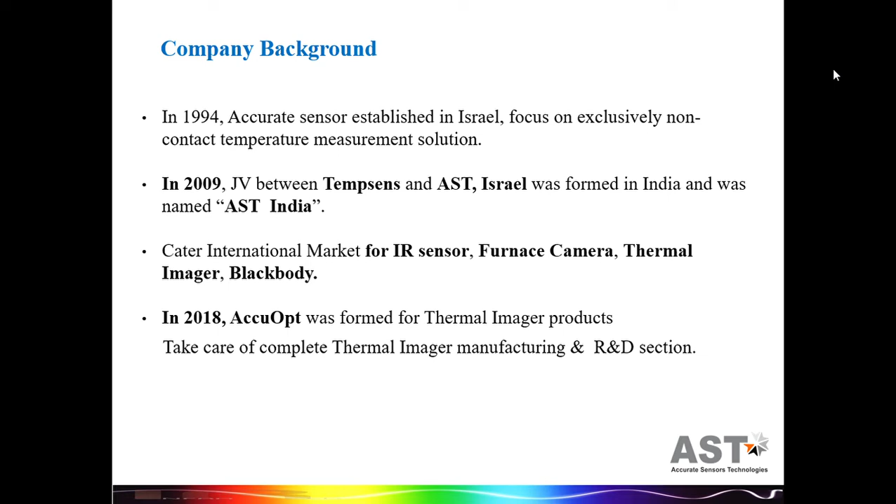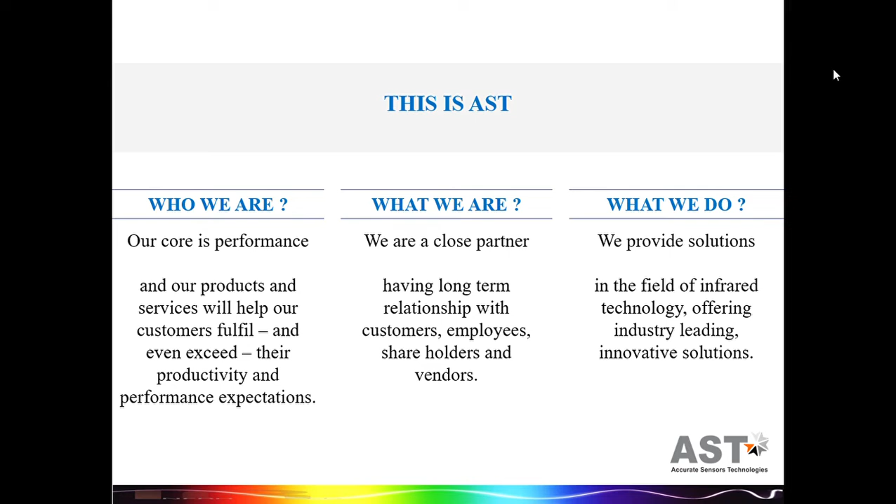If I am talking about AST, then our core is our performance, our products, and our services, which we provide to our customers to increase their productivity and fulfill their expectations. We believe in long-term relationships with our customers, our employees, our vendors, as well as our shareholders. We provide solutions in the field of infrared technology to industries and provide them innovative solutions.

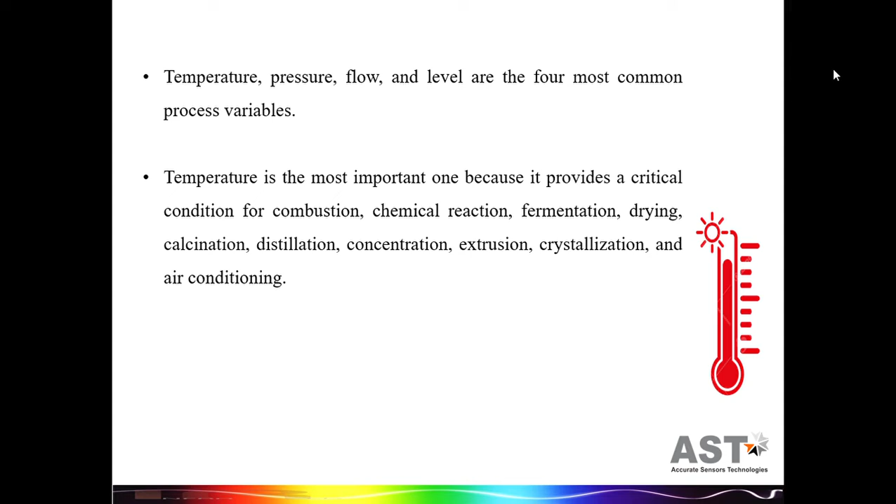Now I'm coming to my topic, infrared pyrometers for industrial applications. As we all know, there are four most common process variables: temperature, pressure, flow, and level. Here we discuss temperature, because each and every process temperature has its own significance.

We can say that if your temperature control is poor, it will become an adverse effect on the safety, on quality, and on your productivity. Although it is often difficult to measure the accurate temperature, here we are discussing the non-contact method of measuring temperature.

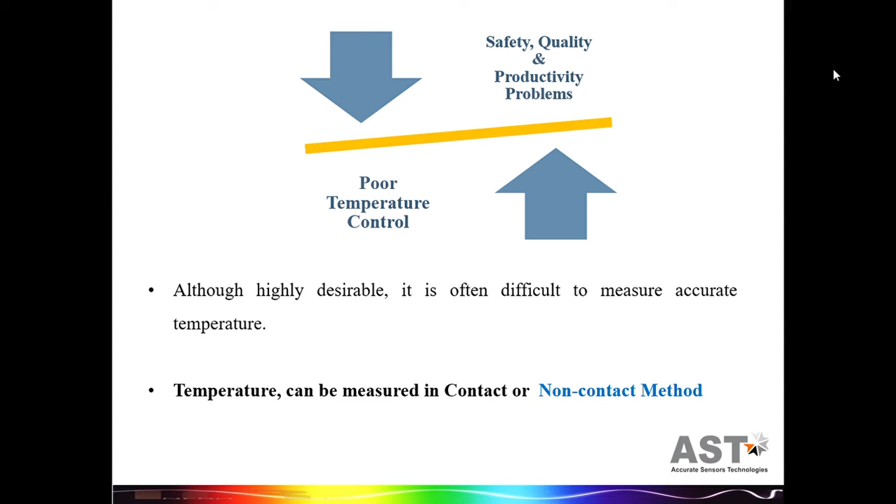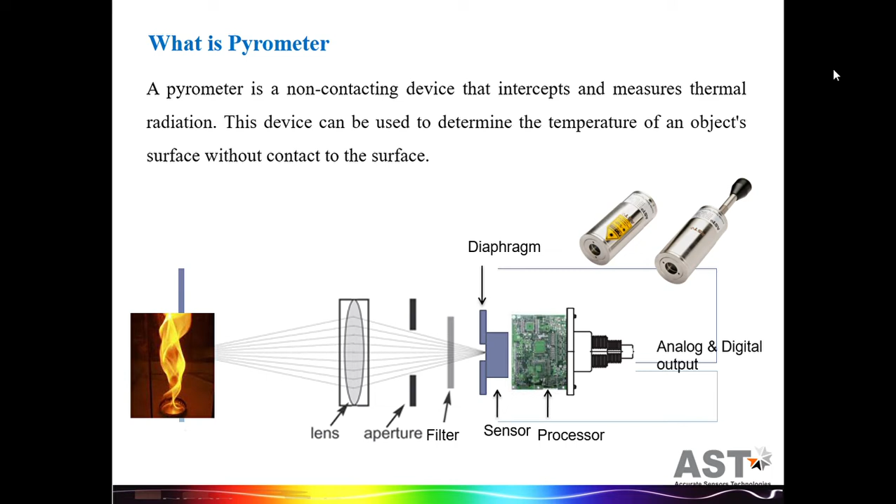To discuss the non-contact method, first we have to understand pyrometers. What are pyrometers? Pyrometers are basically equivalent to cameras. Like cameras, they also have lenses, apertures, filters, sensors, and processors. A pyrometer is a non-contacting device that measures thermal radiations, used to determine the temperature of an object's surface without contact to the surface.

Why do we prefer non-contact sensors? Because they are fast. If your target is moving, then you have to choose non-contact sensors. For hazardous applications, and if you can't access your object physically, then again you go to non-contact sensors. For high temperature measurement, or if your product will be contaminated by using contact methods, you again choose non-contact sensors.

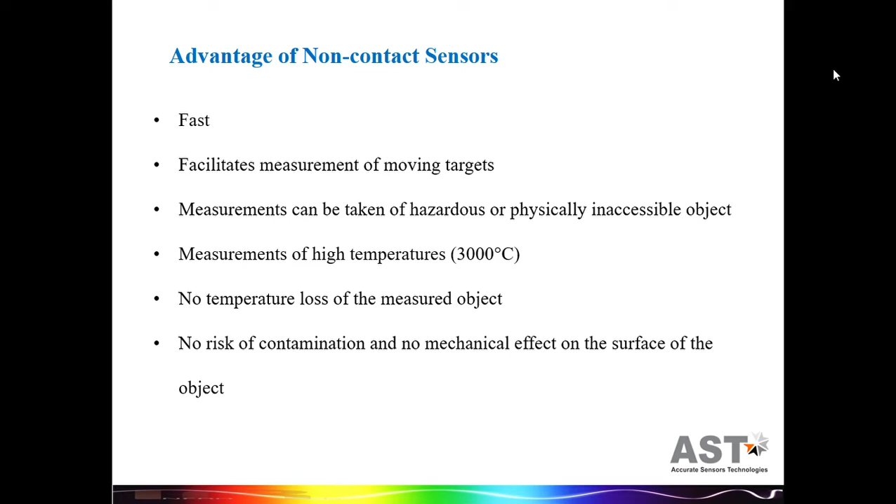AST has a vast range of products in which we are offering so many pyrometers for your applications. We have A plus series pyrometer, A series pyrometer, T series pyrometer, E series pyrometer, glass pyrometer, and portable pyrometer. We have some special pyrometers also, which are Swift, our PGM model, SRU, P390, and P450C.

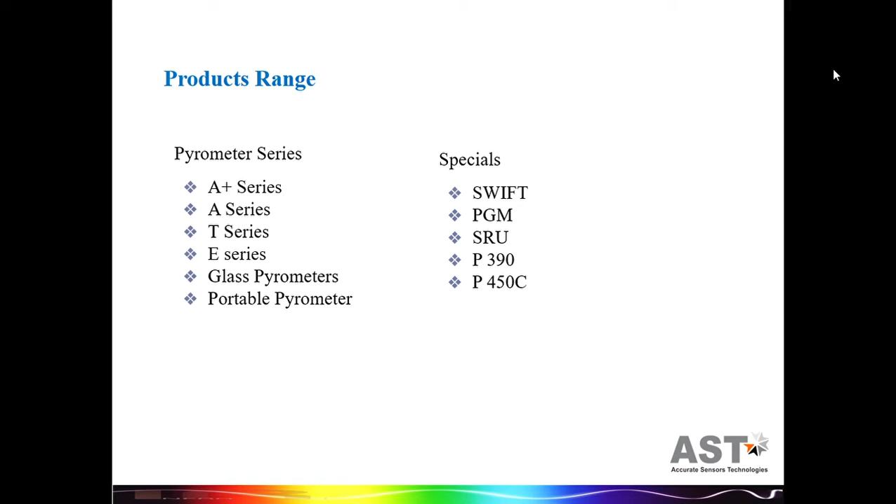It is always a main question: how to choose our pyrometer? There are so many factors on which we can decide which pyrometer is suitable for us. Here I am discussing some factors. First, the major important factor is application. If you know the application, then you can choose your pyrometer. Second is temperature range, working distance, type of surface, and your spot size.

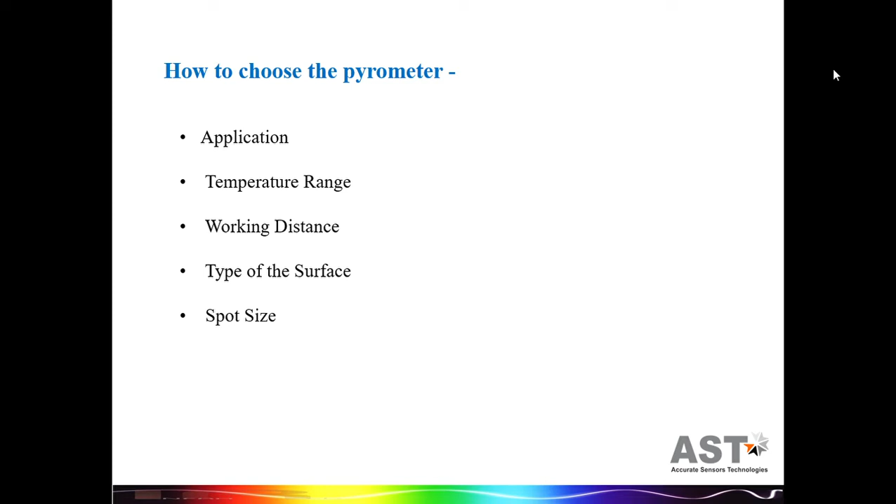Here we suggest some models according to the applications. If you are working on metallic applications, you can go with our A series model, A plus series model, E series model, portable 250 and 450C, T3 model, and FOPL.

If you are working on glass applications, you can choose our model AL 514, T3 514, TL 514, our portable pyrometer 450G2, and PGM plus.

For non-metallic application, we generally recommend AL30, EL50, T3 814, TL8, and TI 1500.

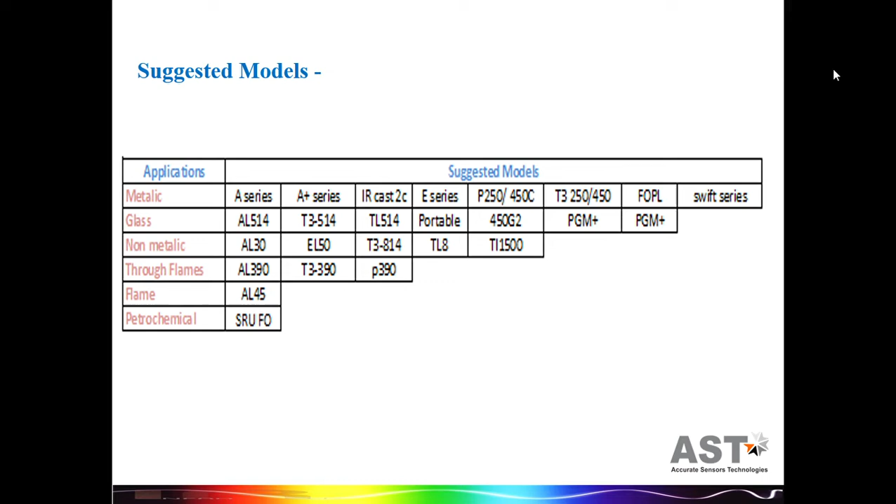If you want to measure the temperature through the flame, you can choose our model AL390, T3390, and P390. If you want to measure the temperature of flame itself, you can go with our model AL45. And for petrochemical industries, we recommend our SRU model.

Now we are talking about steel industry applications. As in the steel industry, there are so many applications where we can recommend our pyrometer. Our first application is annealing furnace.

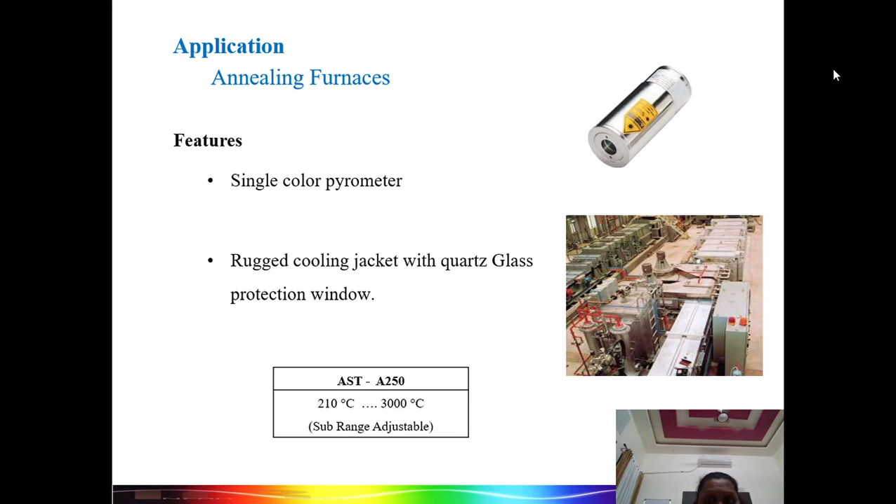In this application, metal is heated to a predefined temperature, held for a certain time and then cooled to room temperature to improve the ductility and reduce the brittleness. So in this application, we suggest our model A250 with temperature range 210 to 3000 degrees centigrade. It's our single color pyrometer, and it comes with accessories like a rugged cooling jacket with quartz glass protection window.

Oxygen furnace ladle temperature before hot metal pouring application. In this application, ladles are preheated before being used. So we recommend here our model A450 with the temperature range 600 to 2500 degrees centigrade. In the software of this model, we can provide you a peak picker facility. This facility enables us to record the temperature of each ladle.

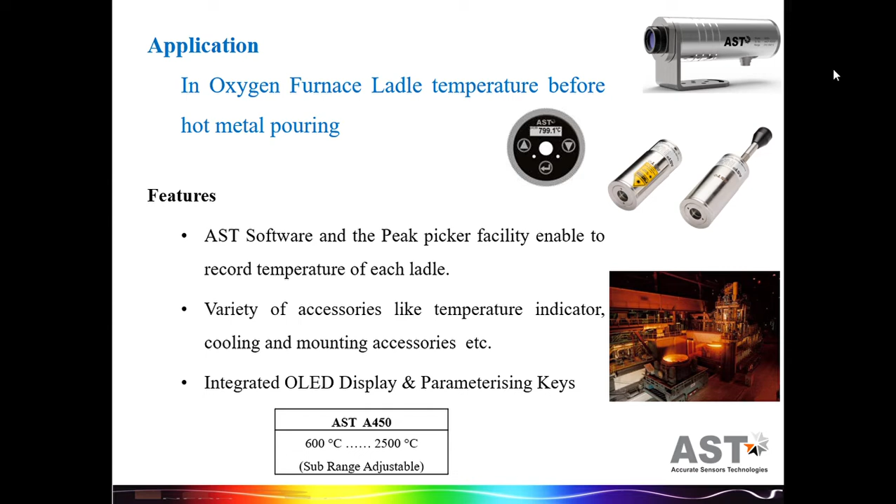In this model, we offer you many accessories like temperature indicator, cooling and mounting accessories, etc. As well as, we have OLED display and parameterizing keys with this model.

For hot rolling application, we recommend our model A450. It is a metalworking process that occurs above the recrystallization temperature of the material. In this pyrometer, again, you have the peak picker facility for continuous data storage, as well as its spot size is small, so you can find the hottest spot and measure the real hot surface temperature instead of oxidation scaling. This model again comes with OLED display and parameterizing keys.

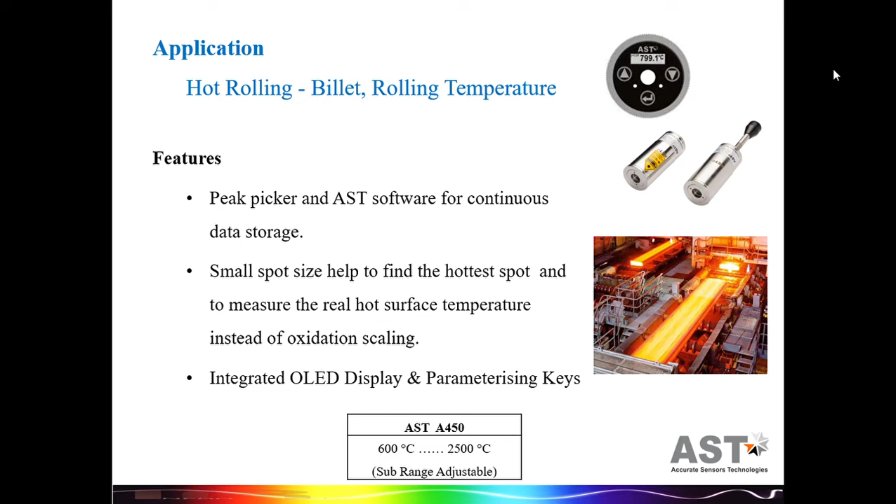For TMT application, we recommend our model A250, A450 with the temperature range 210 to 3000 degrees centigrade. TMT stands for thermomechanical treatment. In this application, many stages are involved like water quenching, heating, cooling. So we recommend this model.

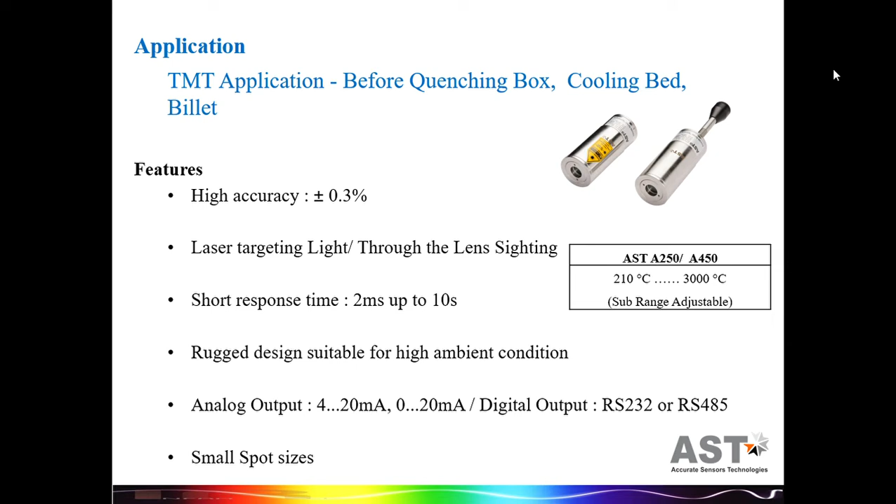It has high accuracy of plus minus 0.3%. It has laser target light as well as through the lens sighting. It has a short response time of 2 milliseconds up to 10 seconds. It has a rugged design which is suitable for high ambient conditions, and the spot size is small.

Molten metal in blast furnace application. In this application, we recommend our model A450C with temperature range 600 to 2500 degrees centigrade. In molten metal application, the end product is molten metal, slag plus waste gases. Due to waste gases and atmospheric disturbance, we recommend our two-color pyrometer. It is a ratio pyrometer which gives us more accurate readings than a single color pyrometer. It has through the lens sighting for precise target focusing, and it has a small spot size.

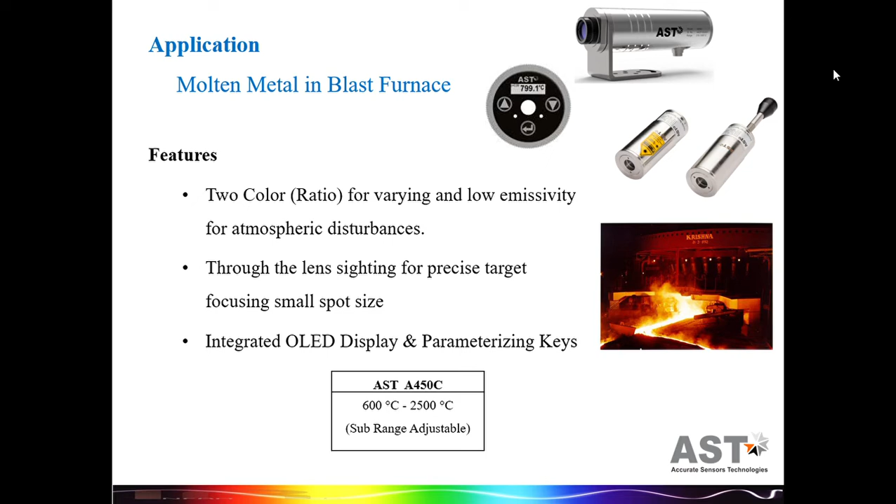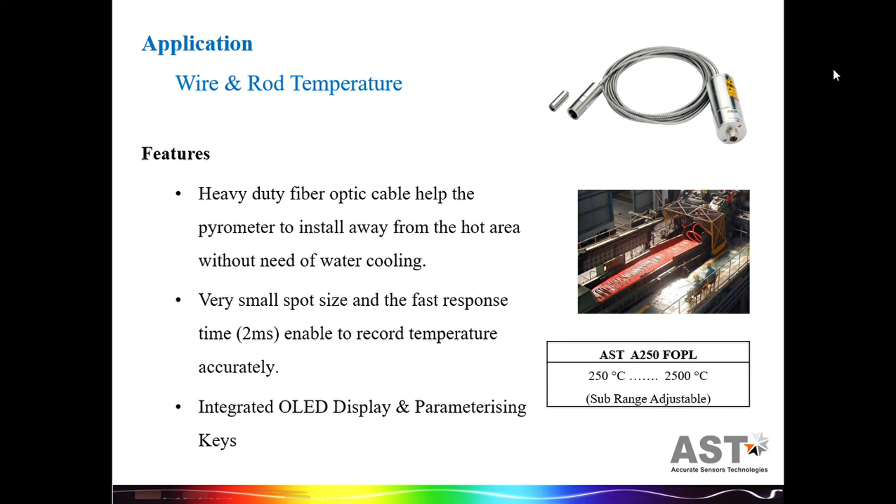In wire and rod temperature application, we recommend our model A250 FOPL with temperature range 250 degrees centigrade to 2500 degrees centigrade. This model comes with fiber optic cable which helps the pyrometer to be installed away from the hot area without need of water cooling. It has a very small spot size and a fast response of approximately 2 milliseconds, enabling it to record the temperature accurately. It comes with OLED display and parameterizing keys.

Stove dome application. In stove dome application, we recommend our model A250 CFOPL or A450 CFOPL with temperature range 350 degrees centigrade to 3200 degrees centigrade, in which the sub-range is adjustable. Stove dome is an important part of iron making in the blast furnace process. So we recommend here our two-color pyrometer with fiber optic cable. The ratio pyrometer helps provide accurate readings, while the fiber optic cable helps the pyrometer install away from the hot area. Its wide angle optical head ensures measurement of a large area of grate.

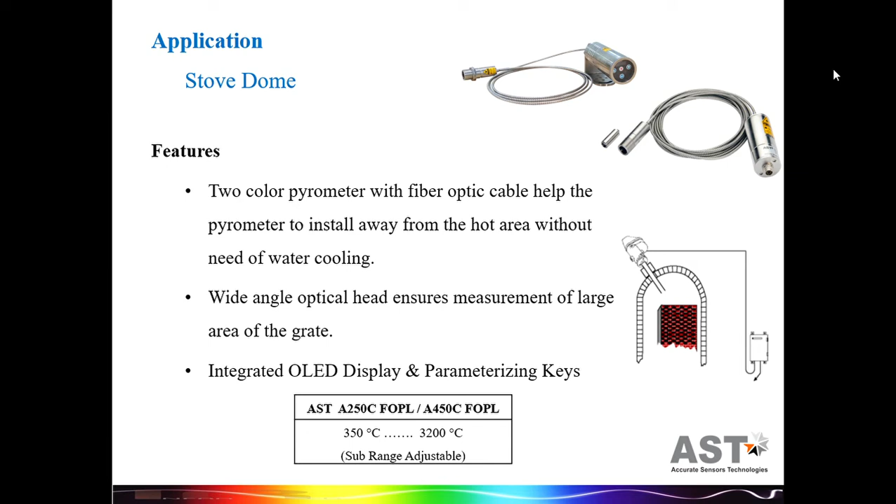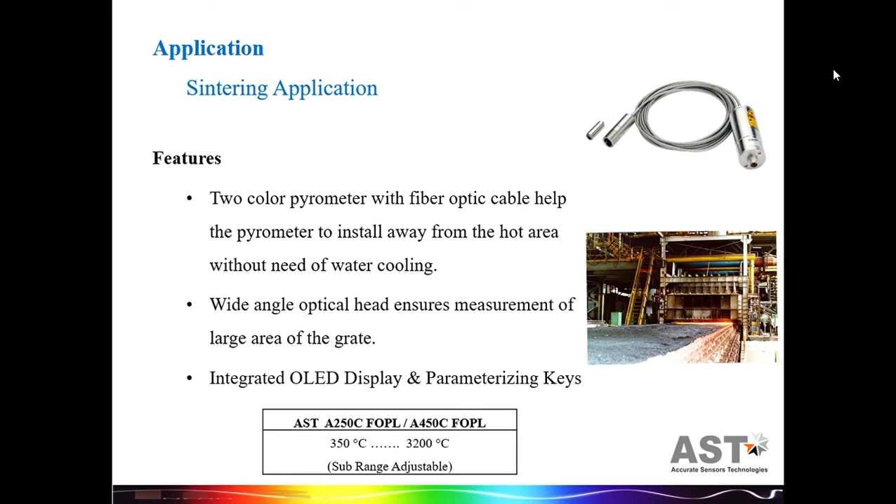Now, sintering application. In sintering application, again we recommend our model A250C FOPL and A450C FOPL. It is a thermal technique of compacting and forming solid material using heat and pressure without melting the main constituent. So in this model we have a two-color pyrometer with fiber optic cable, and it has an integrated OLED display with parameterizing keys.

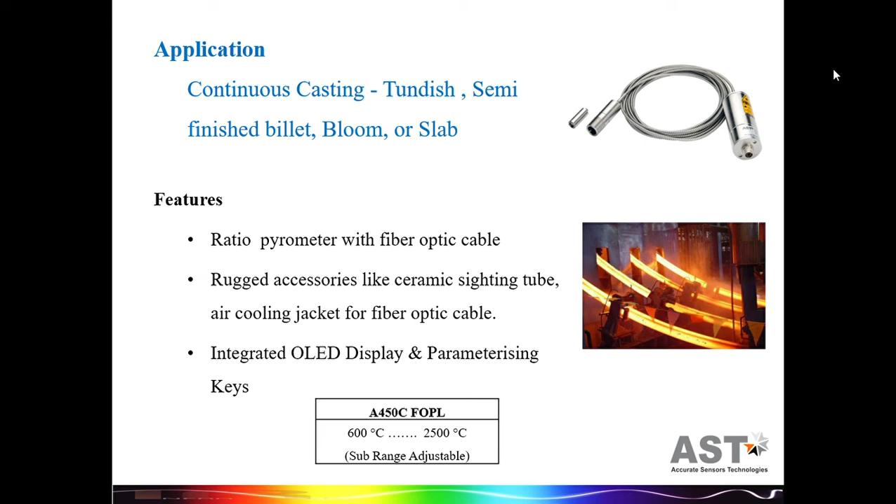Now, continuous casting application. In this application, we prefer our model A450C FOPL with temperature range 600 degrees centigrade to 2500 degrees centigrade. Continuous casting is a process where molten metal is solidified into semi-finished billets, blooms or slabs. So a ratio pyrometer with fiber optic cable is suitable for this application, and we also provide rugged accessories like ceramic tubes and air cooling jacket for the fiber optic cable.

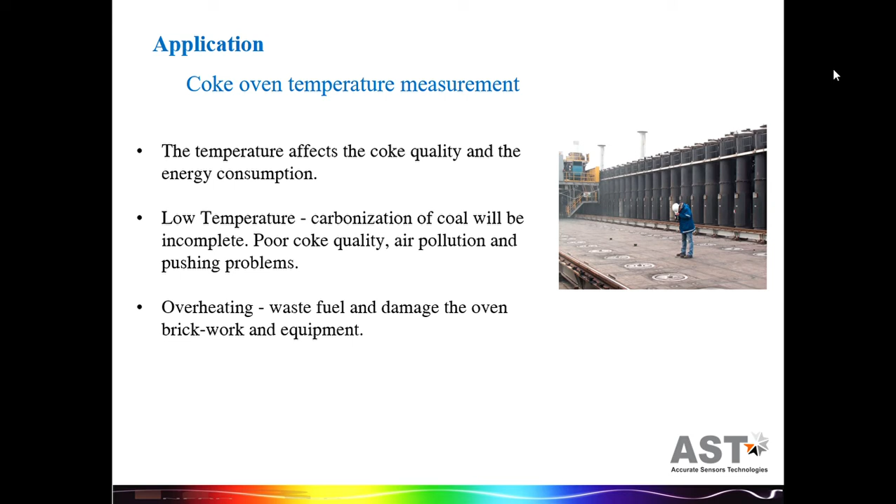In coke oven temperature measurement application, as we all know, temperature affects the quality of coke. If your temperature is low, then carbonization of coal will be incomplete, so it will lead to poor coke quality, air pollution, and other problems. If your coke is overheated, it will waste the fuel and damage the oven bricks. So it is very important to maintain the temperature of the coke oven.

Here we recommend our portable model P250 with temperature range 210 to 2500 degrees centigrade, and our model P450 with the temperature range 600 to 3000 degrees centigrade. In this model we have through-the-lens view sighting. It has focusable optics for adjusting to small spot sizes. It has an LCD display on the model, and it has the capacity to store approximately 4000 values. It has user-friendly software for communication.

Now we are coming to our steel industries and cement industries. In the kiln burning zone application: in the cement industry, this process plays a key role in ensuring optimal quality clinkers. Several changes in the temperature may damage the refractory linings. The cost of refractories is a major expense, so accurate temperature monitoring is important to avoid refractory failure.

So we recommend our model A450C for this application. Due to the dusty environment, again a two-color pyrometer is recommended, and we have accessories like a rugged water cooling jacket and air purge unit with quartz protection window, which make the system suitable for harsh environment applications.

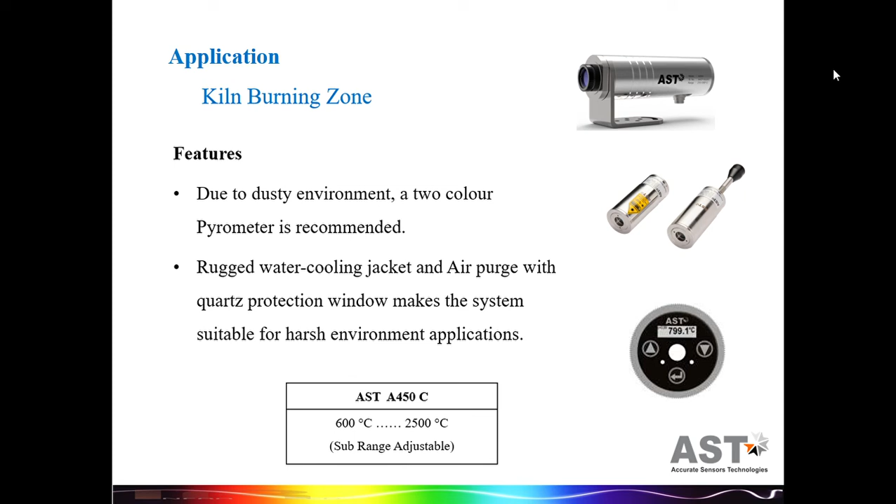In clinker temperature and cement grout temperature measurement application, here we recommend our model EL50 with the temperature range 0 degrees centigrade to 800 degrees centigrade. It is our low cost model and it has the fastest response, in milliseconds. Again, it has user-friendly software and a sensor head which withstands ambient temperature up to 120 degrees centigrade.

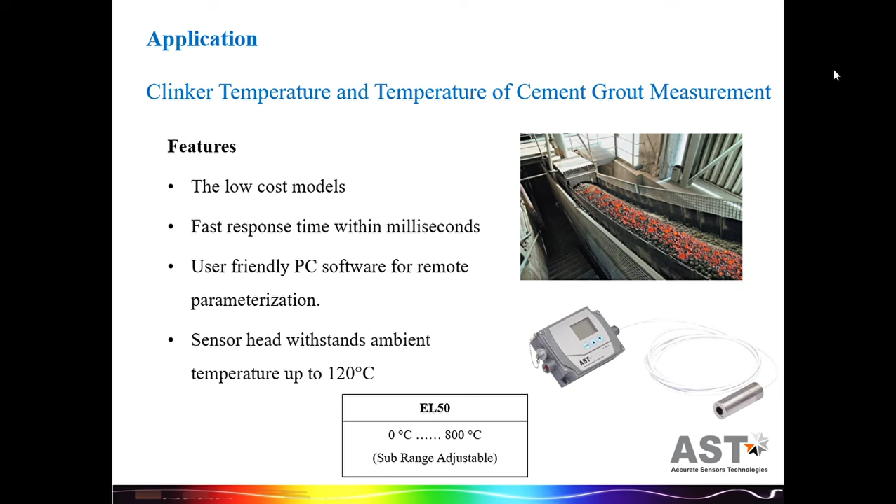One of our cement grout manufacturers wished to record the real-time temperature of the grout over 60 minutes of mixing a small sample in the lab. We recommended our model, by which he was able to record the change in temperature over the 60 minutes for each sample.

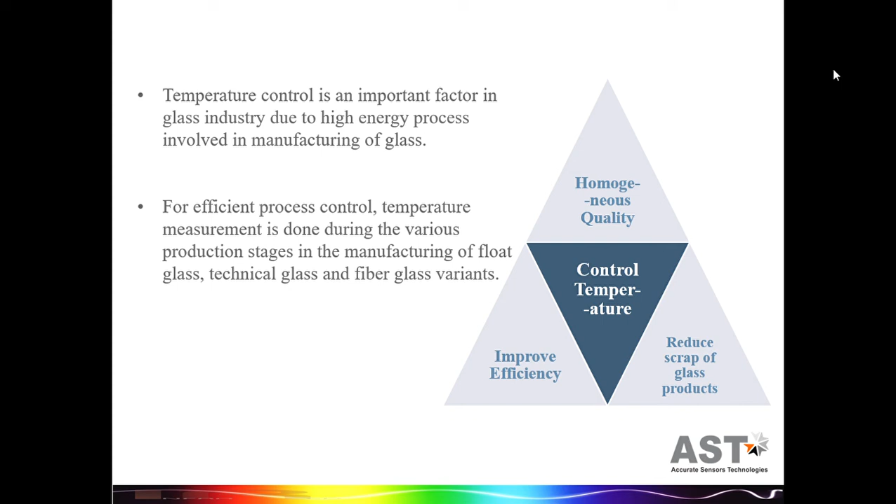Now we are coming to glass industries applications. As we all know, there are so many high energy processes involved in glass industries. If our temperature is controlled, then the quality will be homogeneous, it will improve the efficiency and reduce the scrap of the glass products. So for efficient process control, temperature measurement is done during the various production stages in glass industries. Here we are trying to summarize these applications in 4 parts.

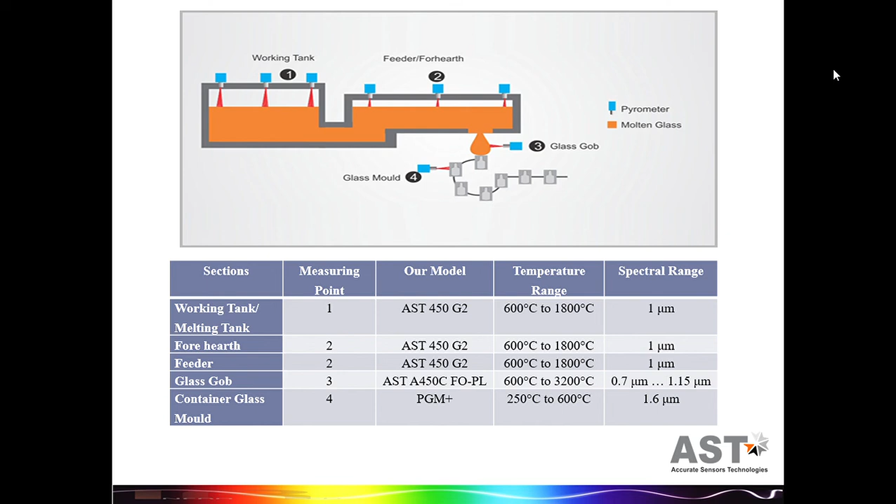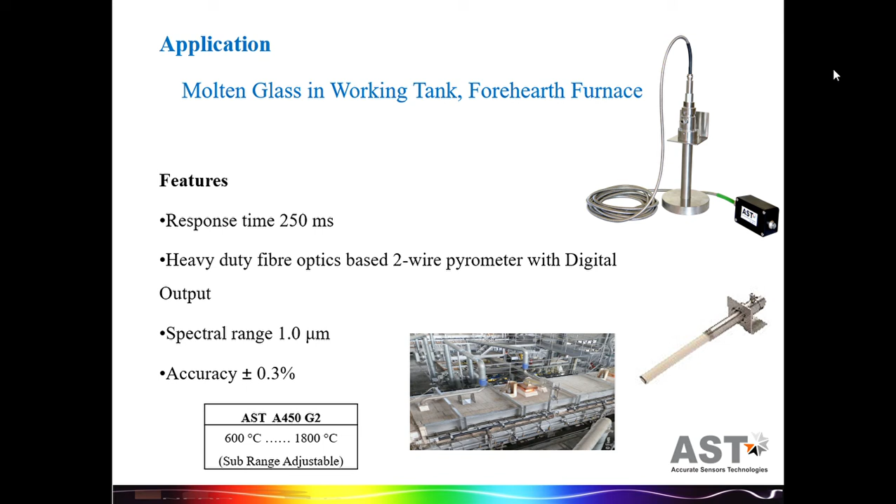The first one is the working tank and forehearth furnaces application. In this application, we recommend our model 450G2 with temperature range 600 to 1800 degrees centigrade. It has a response time of about 250 milliseconds and it is a heavy duty fiber optic based 2-wire pyrometer with digital output. Its spectral range is 1.0 and accuracy is plus minus 0.3%.

In the glass gob application, we recommend our model A450CFOPL with temperature range 600 to 3200 degrees centigrade. In glass gob, it is very important to measure the temperature of the glass, so a faster response time is required. In this model, the response time is 20 milliseconds.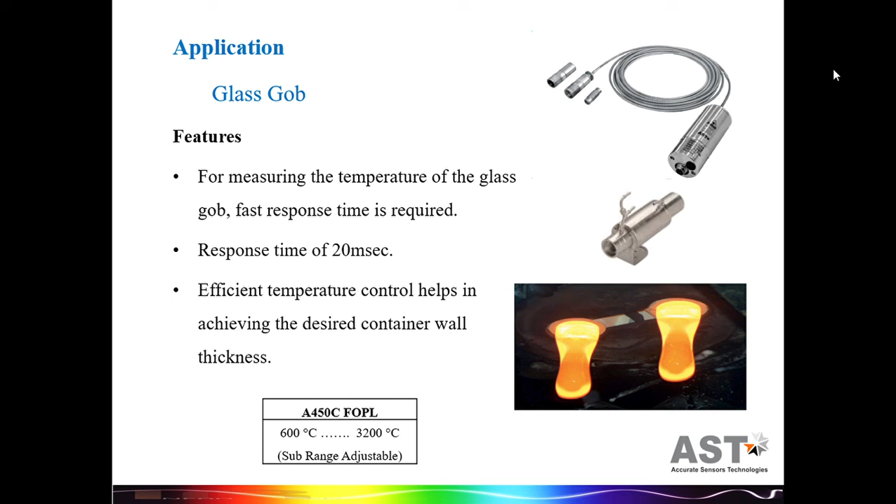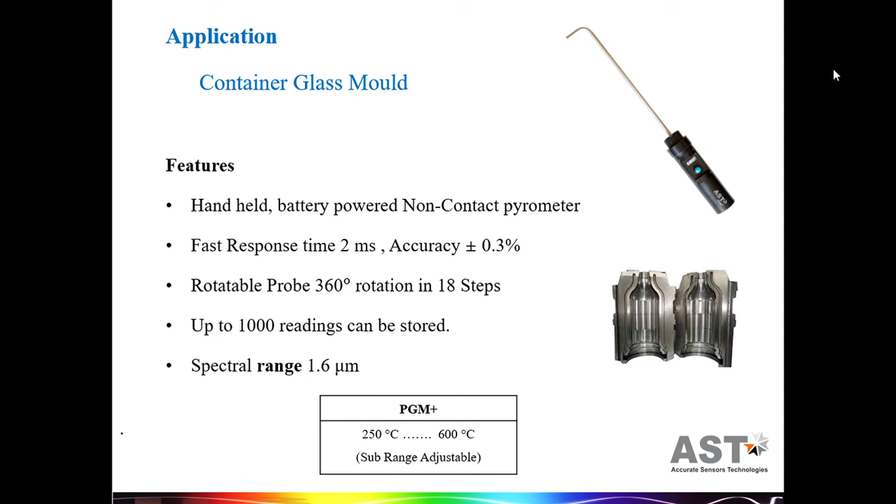In this model, we can store 1000 readings and the spectral range is 1.6 micron. In this model, if there is any problem with the probe, then we can change the probe and use the remaining system.

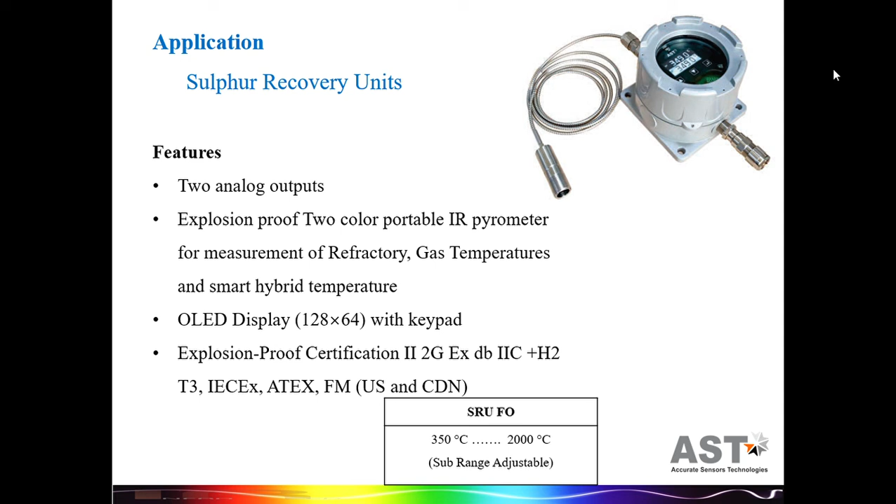Now, in petrochemical industries, we are offering our special pyrometer SRU-FO. The temperature range of SRU-FO is 350 degrees centigrade to 2000 degrees centigrade. It has 2 analog outputs. This model can measure the temperature of refractory and gas at the same time. It has explosion proof certification and it has an OLED display with keypad.

So these are the models which we have categorized according to the application. Beyond that, there are so many applications where we are using our pyrometers.